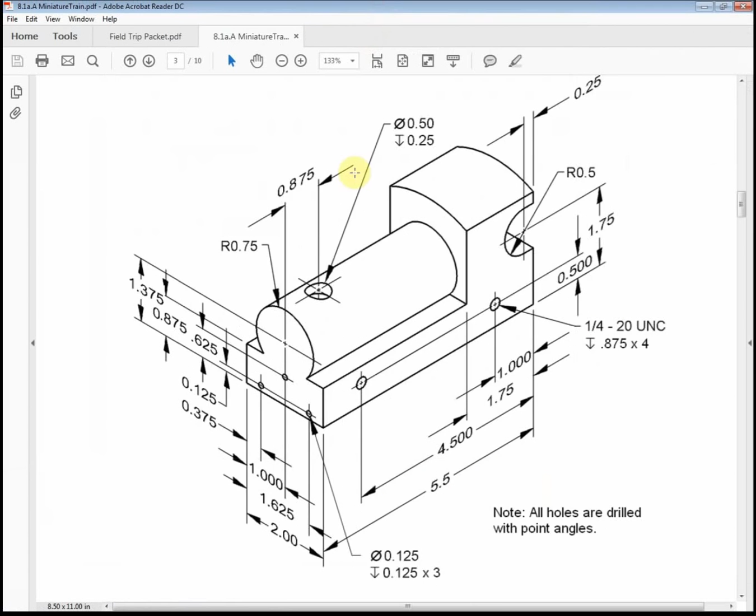Today we're going to work on the train. This is from Project Lead the Way. Let's consider Project 8.1a, Model a Miniature Train.

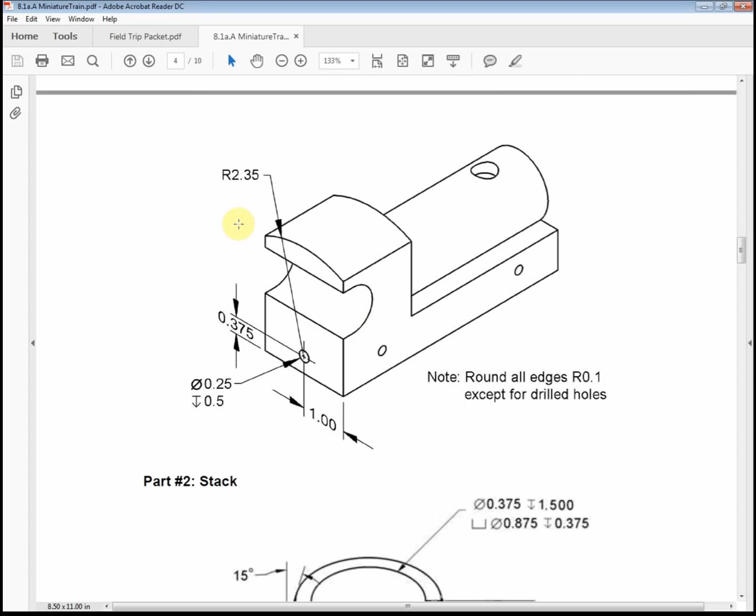Today this episode is just going to be on the body of the train, nothing else. So we're going to work on the body. Notice though the body starts on page 3 and goes on to page 4. So just keep that in mind. To do this back arc, you have to go on to page 4. But we're going to start looking at this main portion.

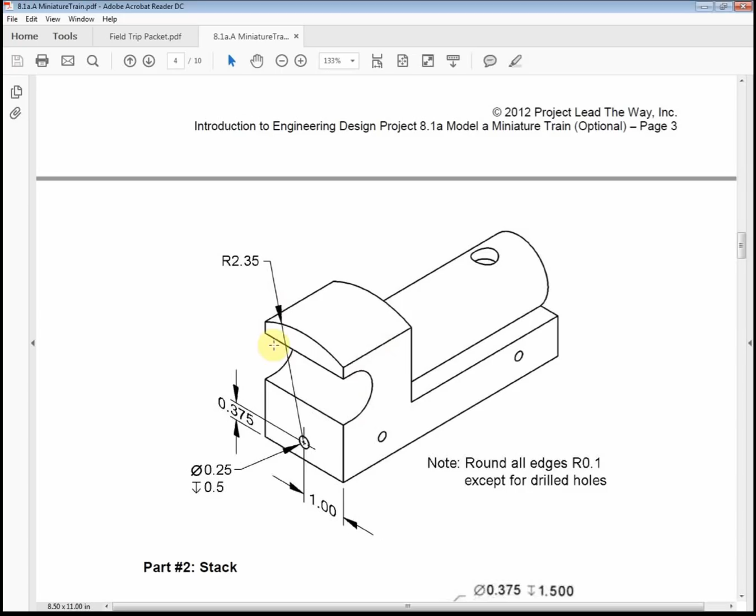Just so you know how I'm going to go about it, I'm going to start off with this section right here, just kind of this bottom flat piece. I'm going to go from front all the way to the back. The reason I'm doing that is so I can get this back hole placed, so I can build up this back piece. That's what's going to happen. And then I'm going to build this circle piece on the front. Alright, let's get that off to my other screen.

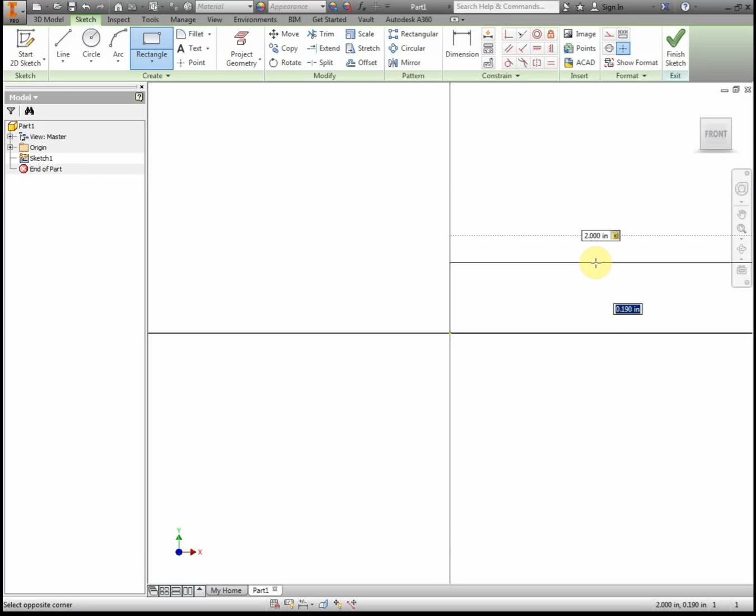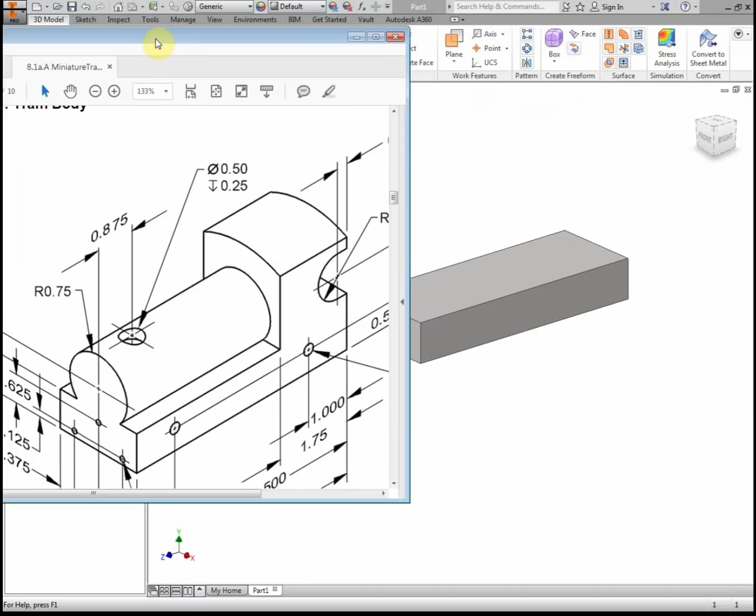So I'm going to first choose a plane. I'm going to choose my XY. That way it's in the same orientation as my picture. Now that is my base. From here all the way back. That is my base.

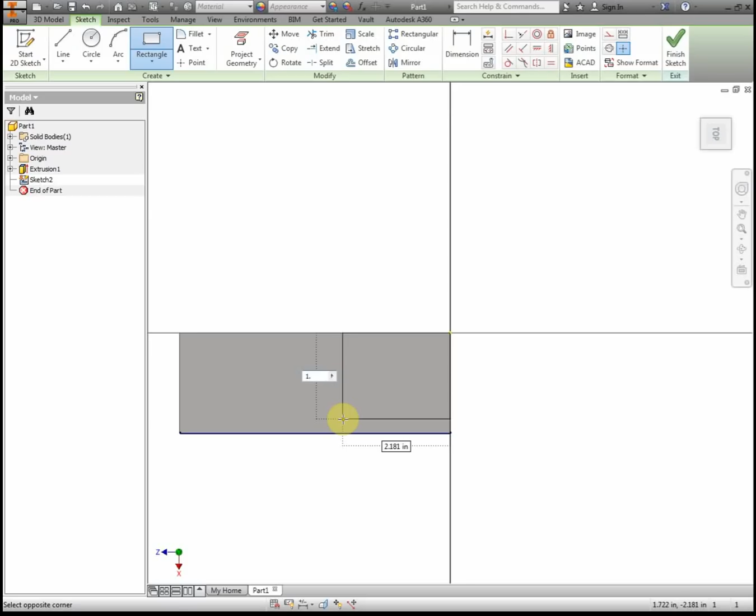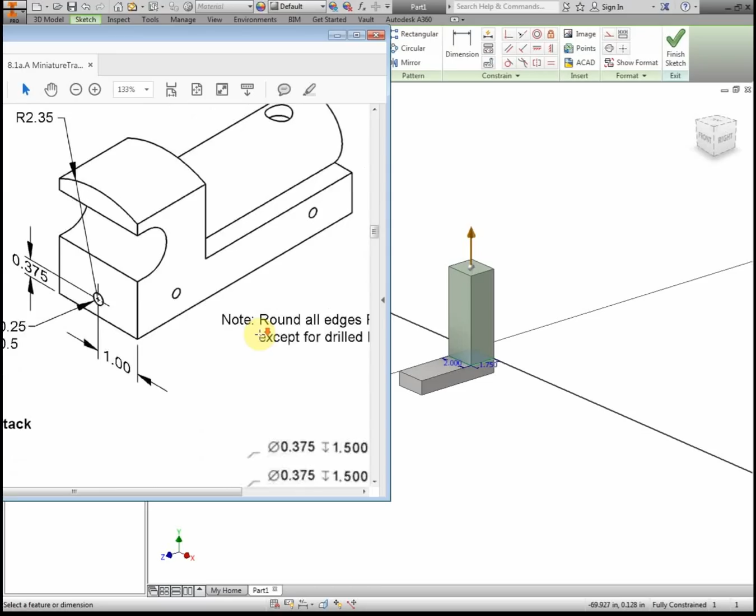Now, I've actually decided to build from here all the way up to this tip top, and then I'm going to cut away the part that's not that curve. So to know those measurements, I have to go from the bottom up to this hole, to the center of that hole, and then from the center of the hole up to this highest point. So that's going to be 0.375 plus the radius of 2.35.

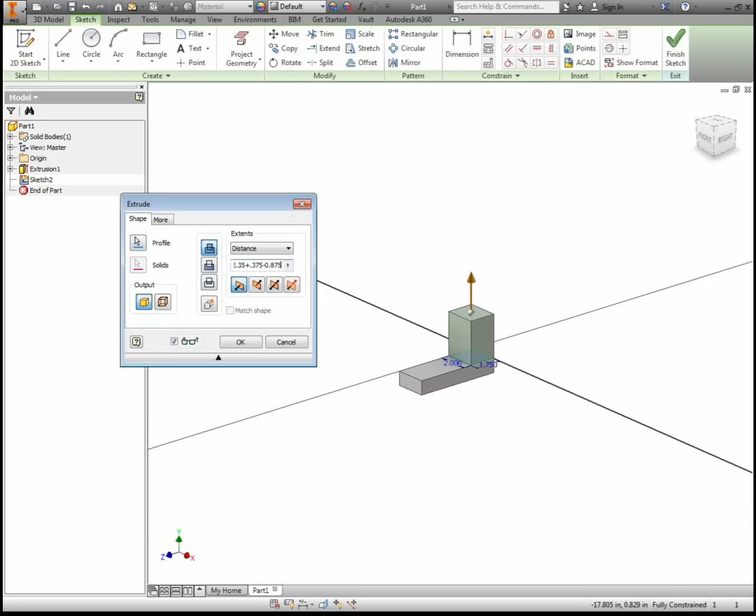And I can actually type those numbers in right here. 2.35 plus 0.375. But I actually want to subtract out the part I've already made up, and that is 0.875. Alright, so now you know what we're looking at here. This is the L here, not counting that we have an arc on the top.

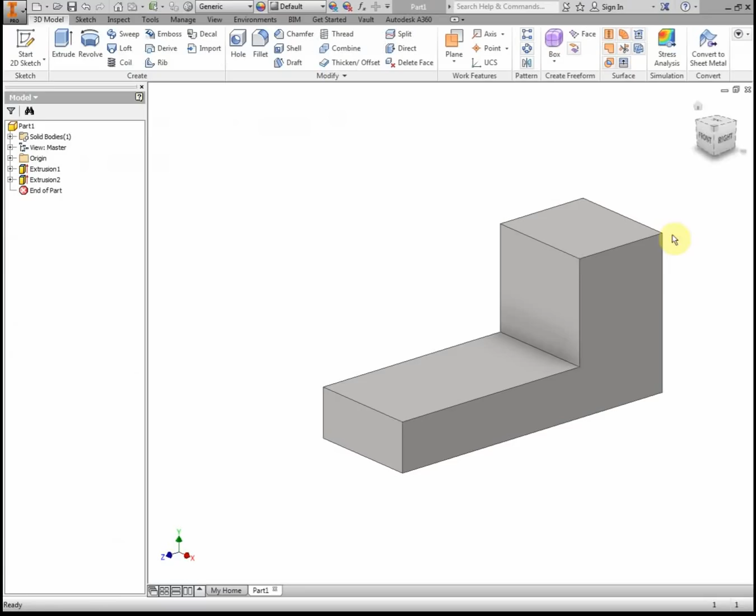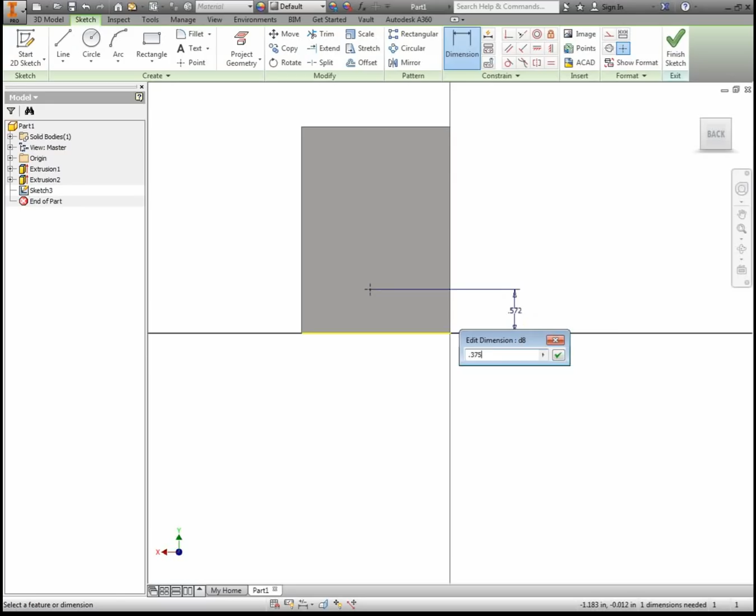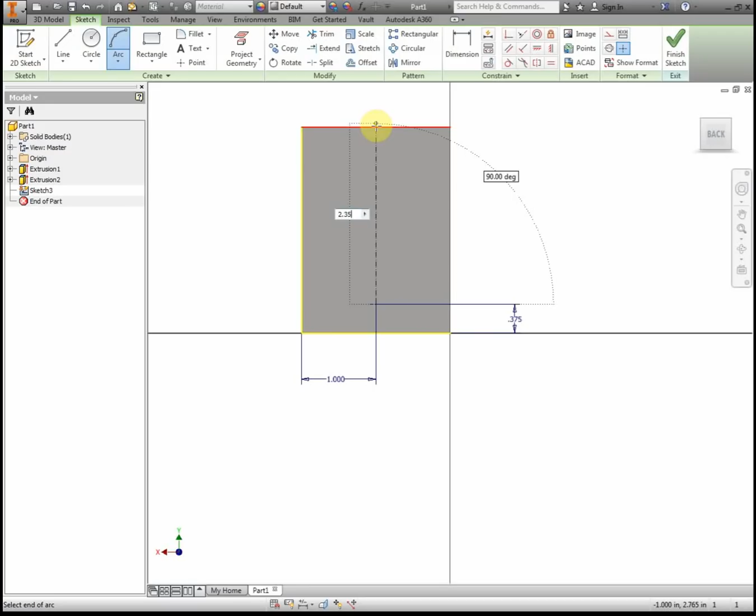Now let's put that arc on the top. I'm going to go down to page 4 and take a peek. I'm going to put a point back here, and I'm going to dimension it so that it is in the same location as my back hole, and it is 0.375 up. Oh, and I hit a plus sign in there. 0.375 up, and it is smack dab in the middle, which puts me at 1. Now I need an arc. Comes from here up to 2.35. That's actually not the arc I want to do.

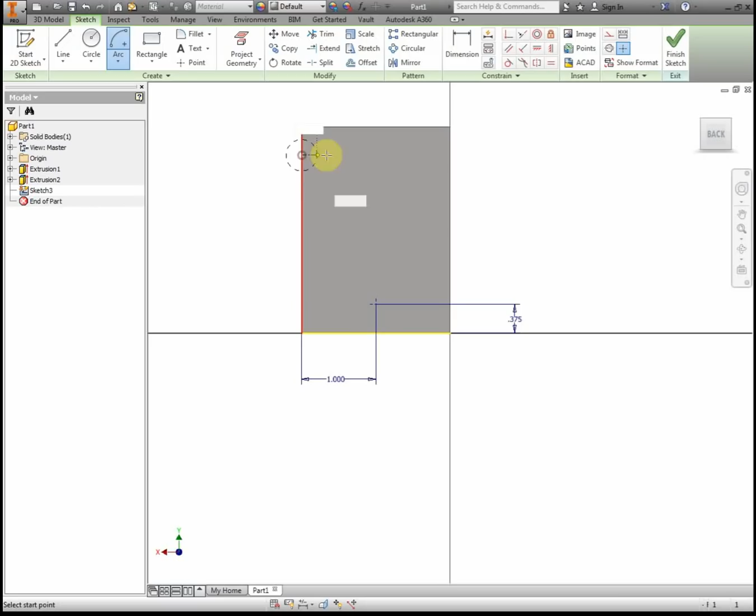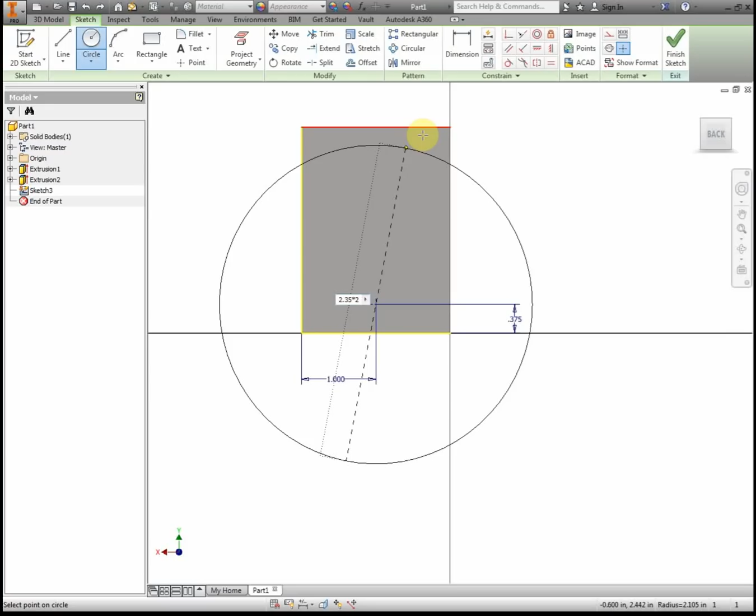Alright, so what I'm actually going to do here is put on a circle, starting at this point and coming out, and I want it to be a radius of 2.35. When you're measuring circles, it puts it in as diameter, so I'm going to multiply that by 2. Inventor can handle that math. Just type in times 2, or asterisk 2. Now if I look up at my top, that arc is where I want it to be.

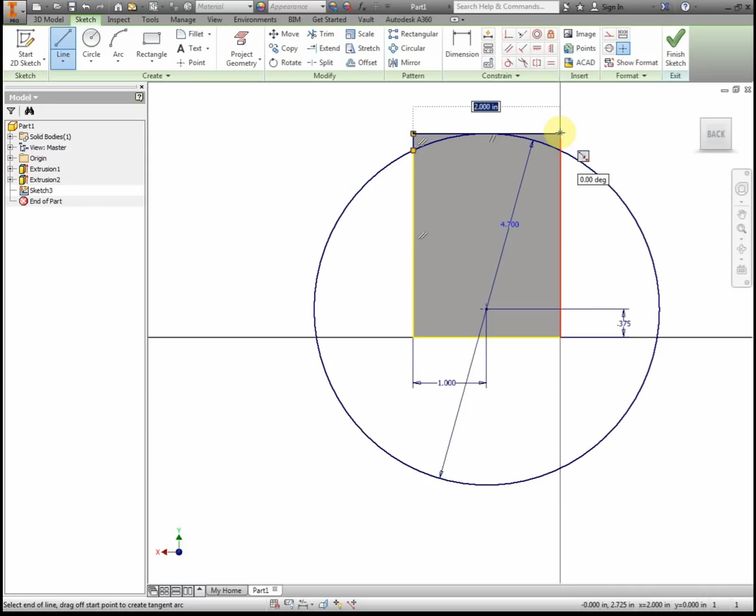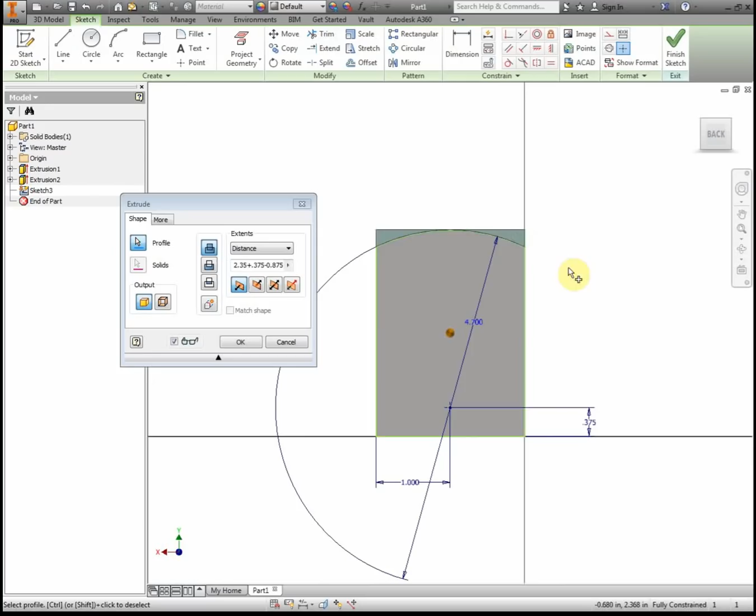Now I just have to do some trimming around. So I'm going to do a couple lines here. Starting on this point, going up. From here over. There. Down. Then let's trim away this excess. And we'll extrude that as a cut. And there it is. I'll edit that sketch so you can see what happened. Let's go to the back view.

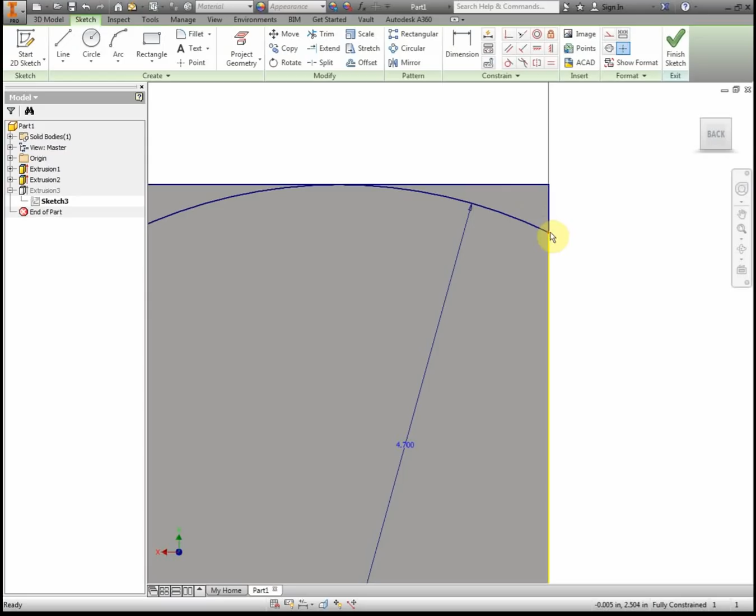I put a circle on from this point, which is where our magnet peg goes in later. That gave me this arc right here that I wanted. Once that was on there, I went from where it was tangent on each side, and I went around tracing that. I used trim to cut away the circle I didn't care about, and I extruded the rest of it as a cut. So now I've got a decent part showing up.

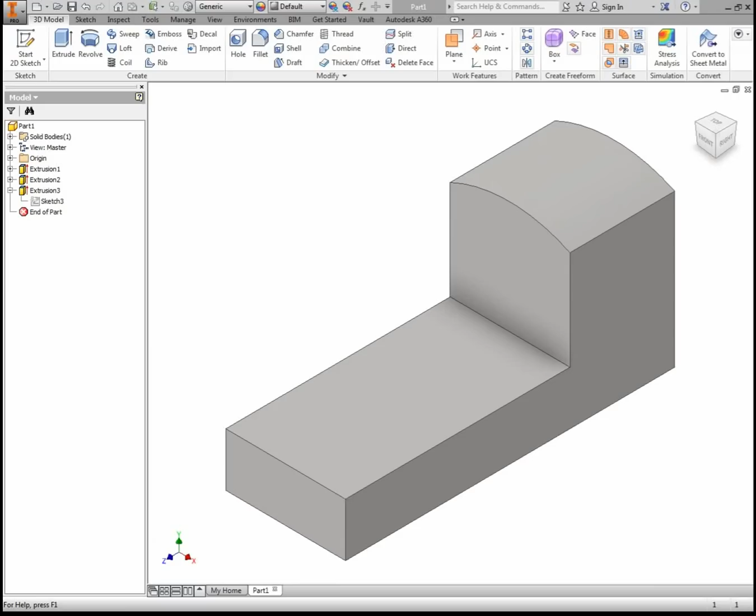Now we've got a couple other little things that need going on in there. We have a big circle in the back. That circle goes over here. It has a radius of 0.5, which means it has a diameter of 1. Now I'm going to dimension that circle.

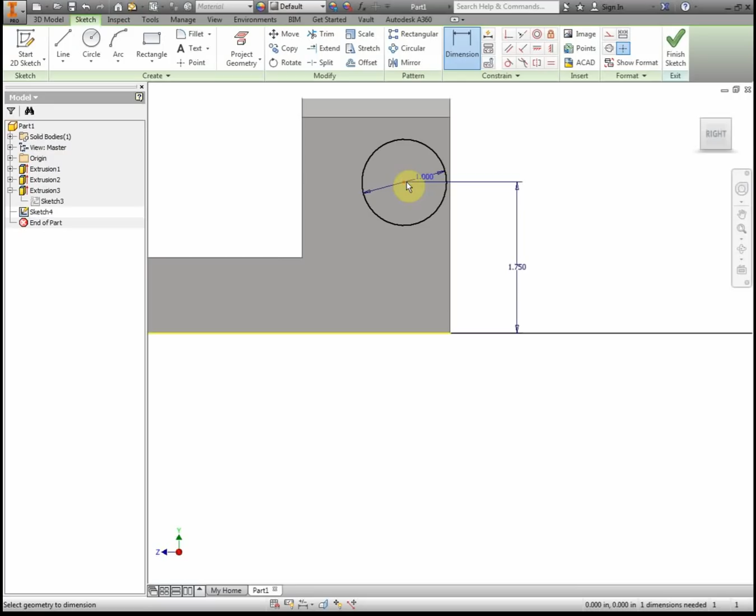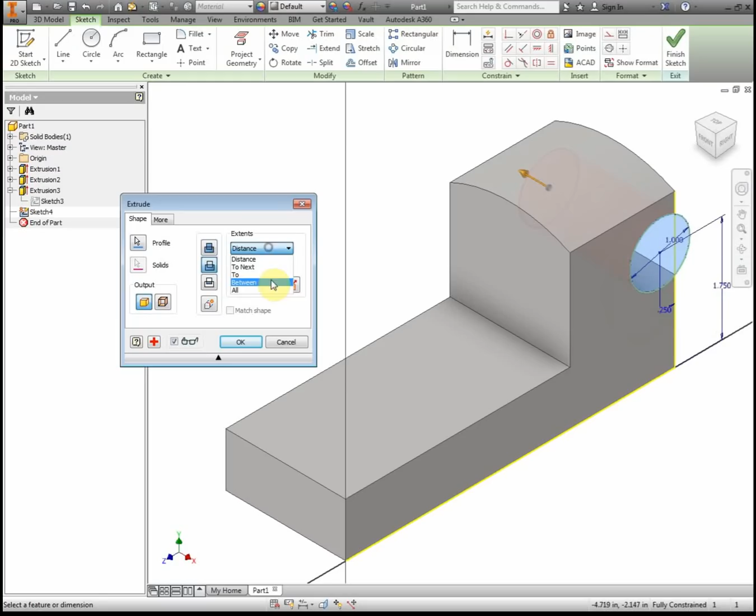And you'll notice it hangs off the back a little bit. This piece gets cut out. So I change it to a cut, or I can change the direction. I want it to go all the way through. So now that's cut out.

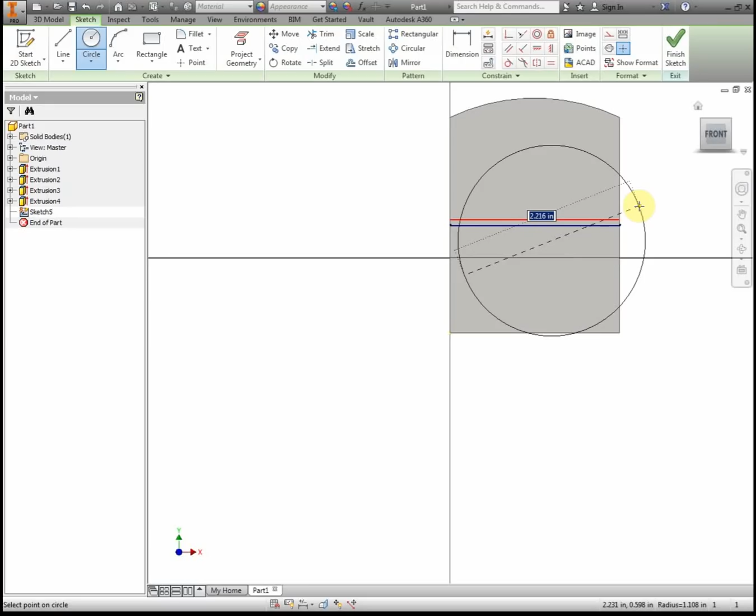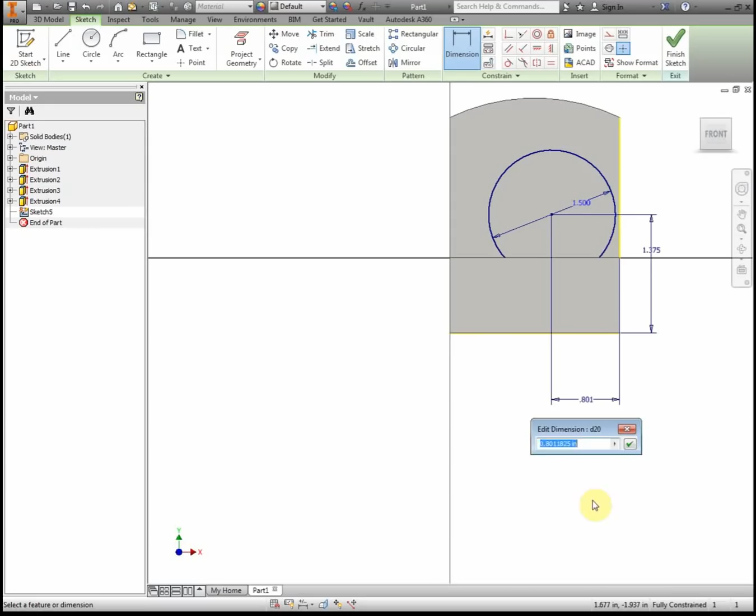Now I'm going to put the cylinder on the front. Start on this back sketch. A circle. I'm going to put it in a generic location, but with the proper diameter. And then I'm going to dimension that. And I want to extrude it. How far? 5.5 minus that back block, which is 1.75.

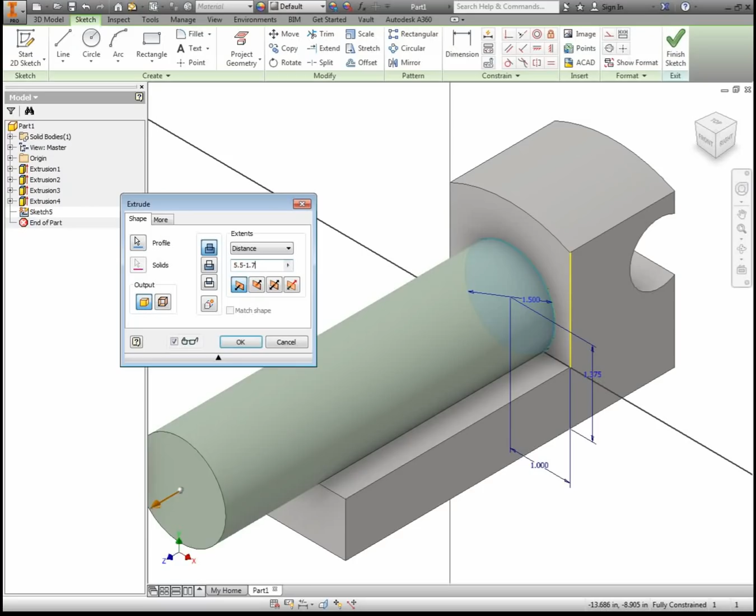And that's most of the body right there. So we have a general outline all ready to go. We have not filleted or rounded off any of our edges yet, and we don't have any holes in it. But that's our main body, and I'm going to call this video quits, because it's a long video already. But that is the train body.

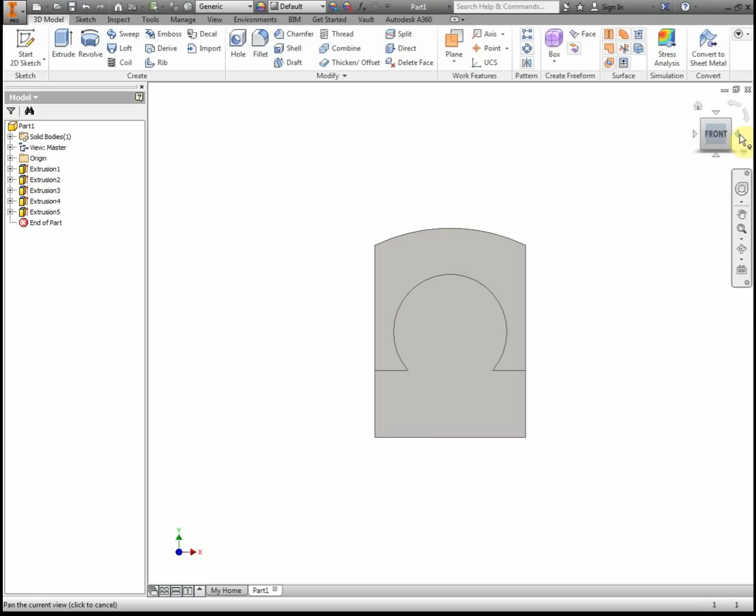Again, I built this bottom platform. I built a rectangle off the back. Then I made this part rounded in the back, up here. Did that with circles and then trimming. I put this circle in the side, and then I put a cylinder on the front. Again, this is a miniature train from Project Lead the Way, and it is the first major part here.